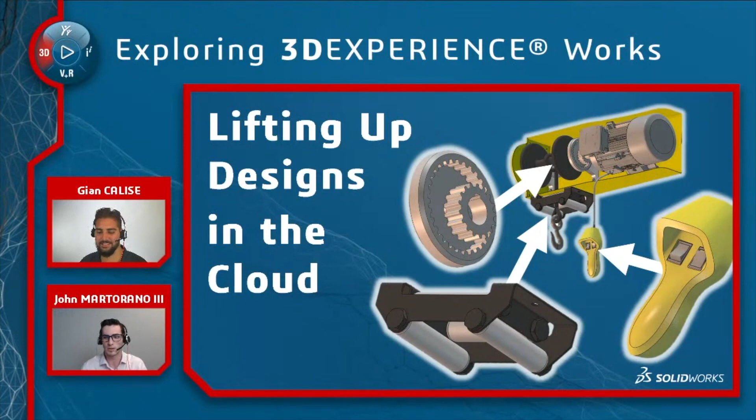In short, 3D Experience Works is a growing portfolio of hand-picked tools by SolidWorks to solve just about any product development challenge. This together you see on screen is 3D Experience Works. We have different brands that cover the different domains of the design process, from design and engineering all the way down to sales and marketing, everything in between, as you see on screen.

What does this design process look like? In its simplistic form, there's a plan, a develop, and a release phase. We all know SolidWorks tackles that develop challenge, but if you sprinkle in all the rest of the 3D Experience Works tools, they fit nicely on this process to provide a one-stop shop of connected solutions. If you joined us in 2020, you know we've been all over the map covering all of these, or at least as much as we possibly can. But today we'll be sticking to our roots and tackling some of the browser-based CAD functionality from SolidWorks, focusing on that develop phase.

So Gian, to go into a little more detail, what exactly are we going to be covering? Yeah, I can cover that.

But before I do, I just saw a comment in the chat that made me laugh. Jordan says, 'Hey John, you look extra smart today.' Yeah, a little bit smarter than usual. If you haven't been with us before, John didn't always have glasses, but we're trying to look smarter every day, you know? A couple years in this job and I'm already going blind.

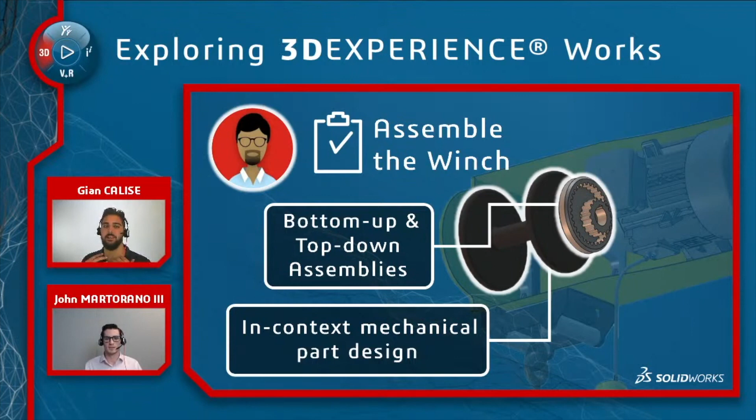From there, we're going to jump over to Debbie. I'm going to be Debbie, like I said. I'm going to show how Debbie Designer designs this controller using our subdivision modeling tool, 3D Sculptor.

3D Sculptor might not be new to you. Last session we had Jordan Tadic come on and show us all about 3D Sculptor, borderline training. So if you ever wanted to get your hands on 3D Sculptor, go reference that video, because Jordan goes from the absolute basics all the way up to advanced features. It was a great session to be a part of.

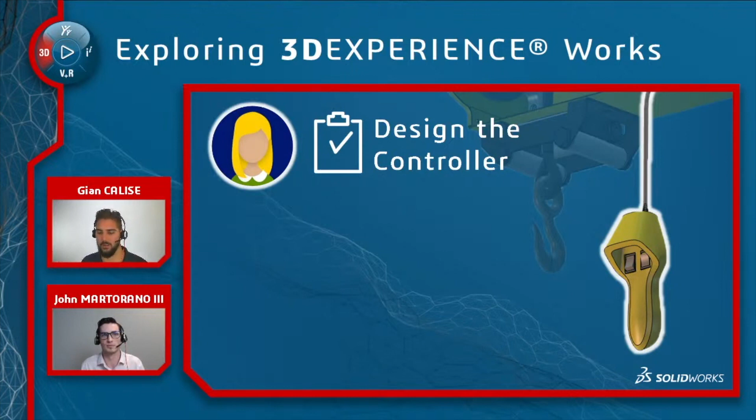In this one, Debbie's going to be focusing on the industrial design side using subdivision modeling, and she's actually going to do this at the same time Eric is working on the assembly. So a little bit of concurrent design, you'll see what it's like to work on the same model at the same time.

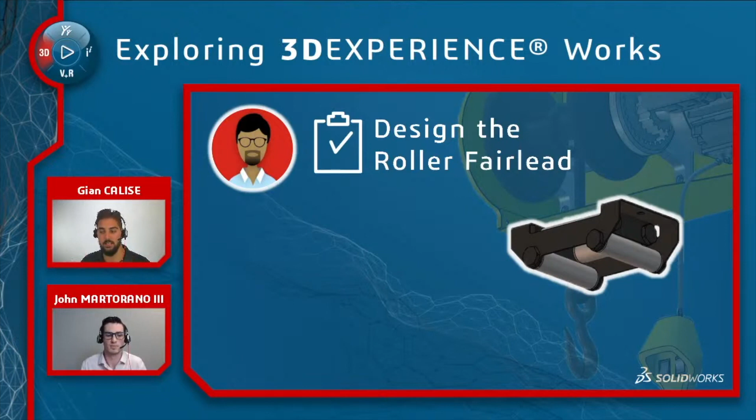Then I think finally we'll have Eric close us out by showing some of that sheet metal capability we were talking about. Taking this roller fairlead, he's going to design that sheet metal frame that is the roller fairlead there. You'll get to see some of that sheet metal part design.

So we have our characters. We've got Debbie, that's me, and we've got John as Eric. So what's Eric up to, John? How's he starting his day here?

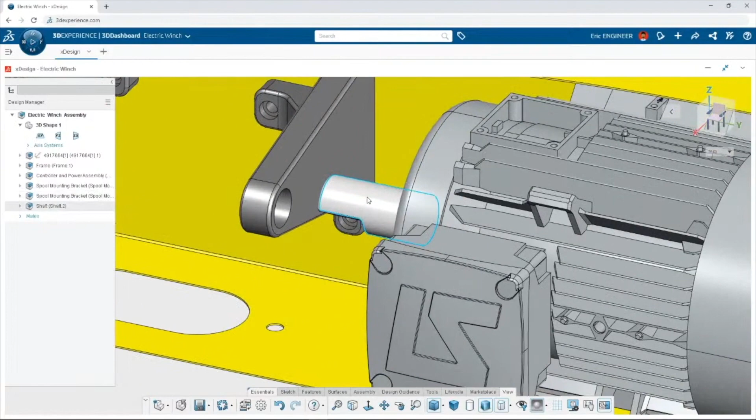Eric is actually going to be starting his day in the browser. This is a fully browser-based xDesign, or 3D Creator. He's starting the day and he sees right away in this assembly that we need some components. Does it look like there's some components missing? I think there's something missing there. Yeah, maybe a couple gears that might help.

Couple gears, right. So there are a couple different ways Eric can go ahead and add these. One, he has a separate widget of 3D space, which is where he keeps all of his data. Down below, he can insert one of the gears that way. If he wants to, he can also access that same 3D space just by searching exactly what he's looking for. You can type in as little or as much as you want, but the more you type in, the more specific those search results get. And because he typed it exactly right, he only got one or two search results.

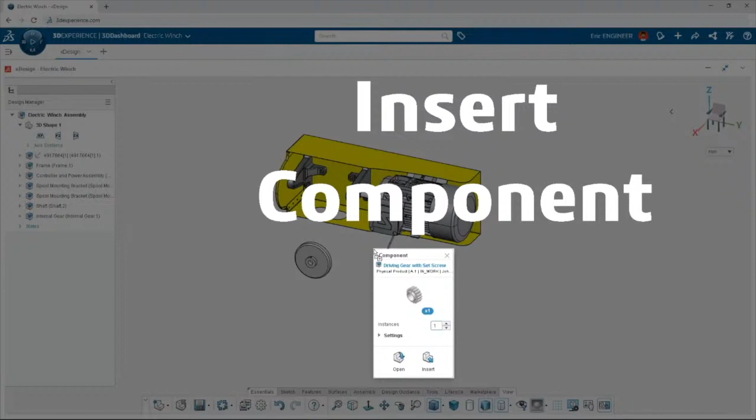So that's good. Now Eric has the option here: he can either open it up separately, or he can insert the component into the assembly, which is what he wants to do. It's also important to note he has the option to add a couple instances if he wanted to as well. But in this case, he only needs one gear, so that's what he'll do.

Cool, so you're just throwing them out into space. Yeah, pretty much, throwing them out into space, which is pretty cool. He could toggle a view if he likes; there's a view cube for all sorts of different views.

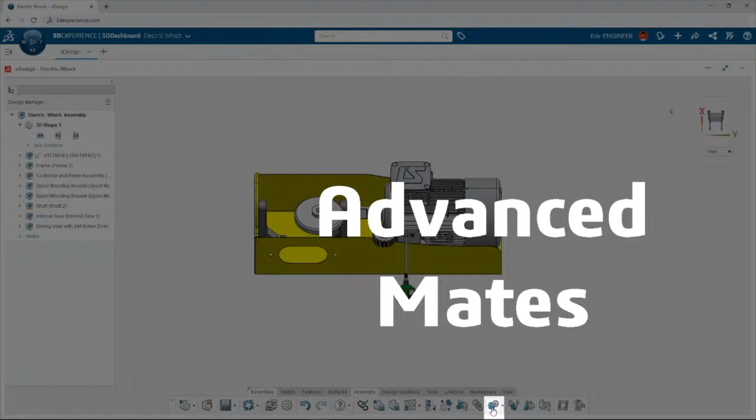But up next, what he needs to do - well, new to the latest release of xDesign are the advanced mates. So today we're going to be taking a look at the gear mate, or it's called the gear joint in xDesign. But there's also a rack and pinion joint, as well as a pulley joint. So there's a couple different options, but today we'll just be covering the gear joint.

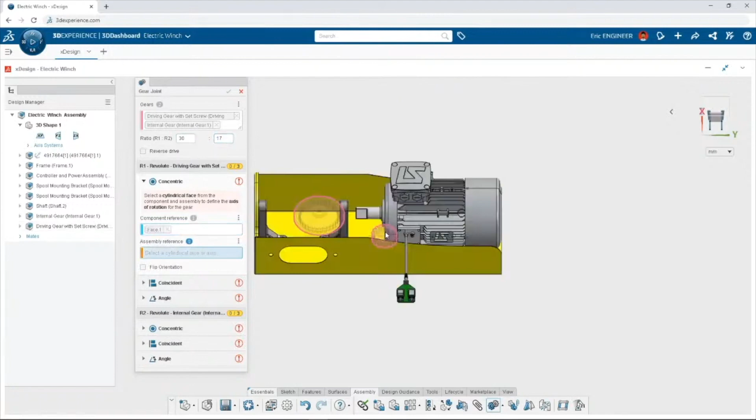All you need to do is really just select those two gears. Now he has these completely out in the middle of nowhere. He could have defined them, and xDesign would have been smart enough to recognize the mates he has to add now. But it's also pretty cool to just be able to start from scratch, right - into the middle, or have your models just floating, and then define where you want to place them. So it makes sense, right?

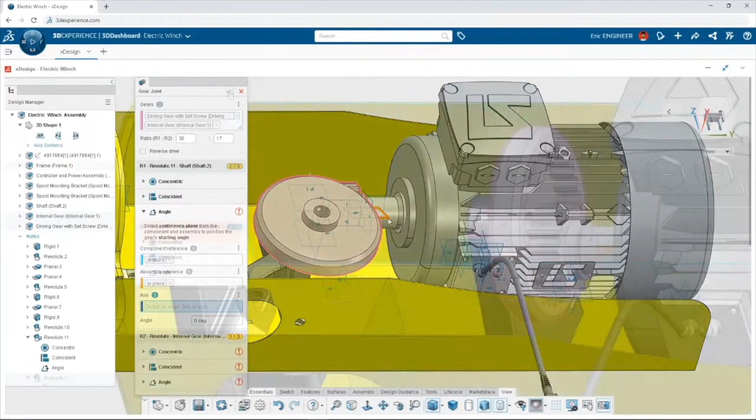He can also toggle some views if he wants to help add some mates. In this case, he's going to define an angle mate to actuate this gear as well. So he's going to choose two planes for that. And because we already did that for the first one, we'll just kind of fade through for the second one, and now they're all in position.

Let's see the moment of truth. Eric sees all three of the different mates that he needs to put in are all in there, and he clicks the green check, then gives it a move, cleaning up the tree a little bit. He can clean up shop by pressing the V key, same as going to the toolbar, to hide those planes once again.

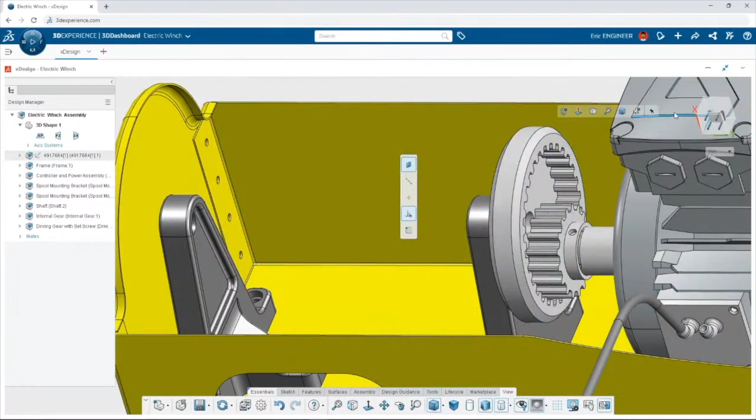He also has a trimetric view, which is pretty cool. If you hit the F key, that'll focus the model into the center of the screen. Then he can begin designing the spool that he needs to design.

We're going to do some design right in context of the assembly by creating a brand new component right inside of the assembly. Eric's going to select insert new component, and he can go ahead and name this new component.

Obviously, it's going to be called the spool. He can decide where he wants to place this component. In this case, he's just going to add a couple mates to get the origin where he wants it to be essentially. Since we already know how to do that, we'll fast forward a little bit. We wanted them right in between those two brackets, it looks like.

Now pay attention here, because now we're selecting external references. This is where design intent really comes into play, because if Eric selects the external references here, we'll be able to keep our spool within the confines of these two mounting brackets forever.

So if we ever make any changes downstream, we can kind of retain that. It basically makes those references sticky, like it makes the references stick. That's a great way to put it.

So now when Eric selects this, he uses one of the edges for the mounting bracket to define one of his sketch parameters, it's now going to be using that as an external reference, and it's going to basically stick to that face forever.

We have the S key as an option. In this case, Eric's going to use this S key, our shortcut tool, to kind of trim away some of the excess material he wants. He can pull it up again if he wants, and this time we'll add dimensions.

So John, is that S key brand new, or is that something we've seen before? It might be familiar to most SolidWorks users, and a favorite, if anything. Yeah, that's definitely my favorite feature.

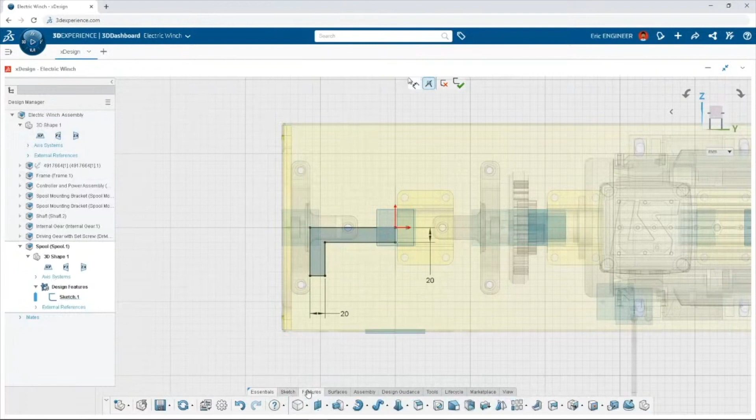Eric can come down to his features tab now and notice he's just going to hit extrude. You're like, well, why would he do that? It just looks like a block shaped L. Well, this is our super feature.

He can select extrude and just change it to a revolve later on. When he does that, all he has to do is really just click one axis, and boom, he's revolved the first half of the spool. Simple, just pick an edge.

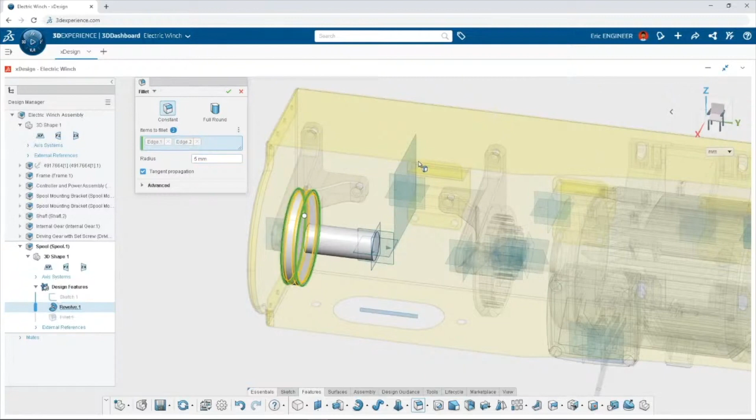Eric's going to add a couple fillets. Then he can use his buddy, the selection helper, to help him make some informed decisions about maybe what other edges he might want to select. The best part is, if selection helper doesn't select the edge he wants, or maybe there's one that's left out, no big deal. Eric can just add it right in there.

So John, you only made half of this though. What's going on here? Yeah, what we're going to do now is use the mirror plane, and we're going to mirror the other half of this component.

This all comes down to design intent again. This is to make sure that if we ever make any changes, the spool will stay right in between those two brackets. So Eric can now start a sketch. Important to note, you can also start it from the toolbar or the S key, doesn't really matter.

We do have this new feature, new to the latest release, the insert sketch feature. So if you have a pre-existing sketch that you want to use, we're just going to choose and search for a previous model we've already used. In this case it's called skeleton, the skeleton key lock we created. And it's going to identify these sketches, and Eric can choose from the list of sketches and insert it exactly where he wants it to be.

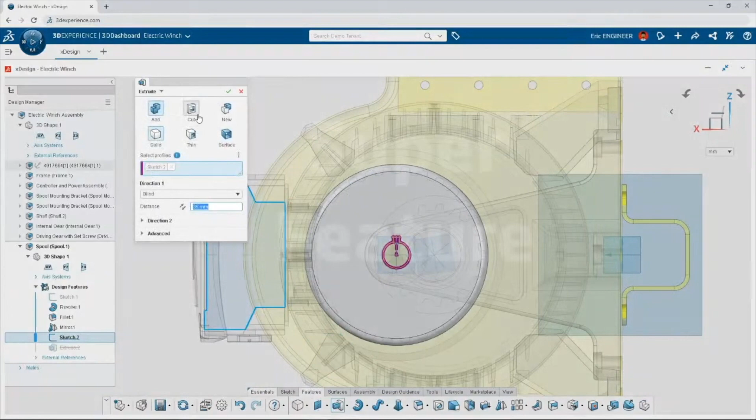So again, Eric's going to click this extrude button, but this time he has the option to not only add material but cut away material. He can make it a surface if he wanted that. It's cutting through all of the geometry. Let's just take a look at what that looks like. Yeah, I'd say that pretty much satisfies it.

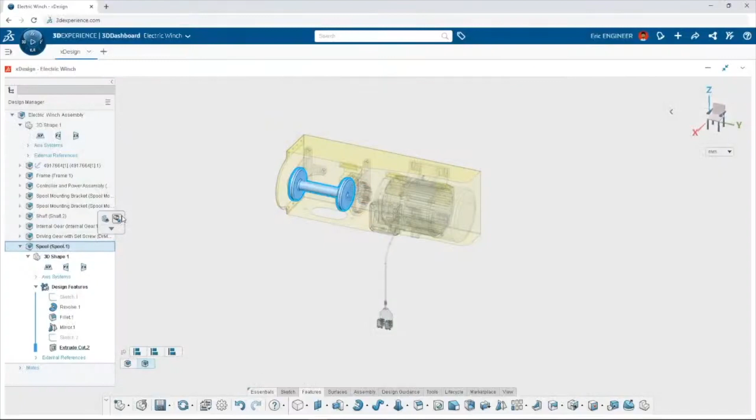I guess the last thing Eric needs to do here is just apply some material. And again, we want this really strong, so we'll just choose 1023 carbon steel there.

And wouldn't you know, we've pretty much done everything we needed to do. But how about we test out what it looks like? Like what happens if you need to make a change? Let's go ahead and do that.

So what Eric's going to do is basically edit the sketch, and this is the base layout for the actual sheet metal component. When he does this, he can just change one dimension, changing it from 250 to, let's say, 270.

And then watch what happens. So it should make the spool a little bigger then, right? Boom, you see that? It updates in real time. That was quick, but I did see it.

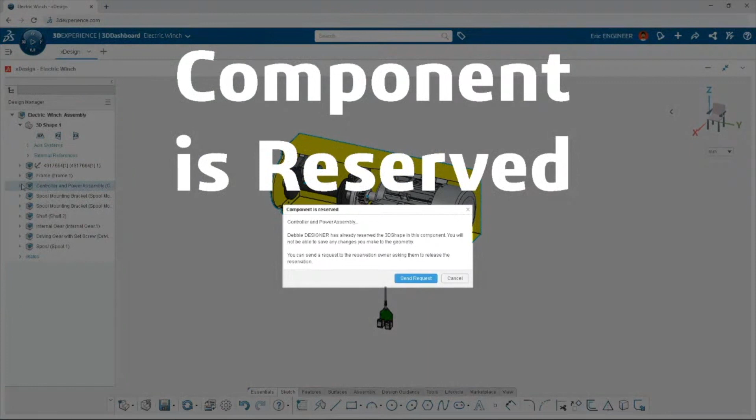And I guess the last thing Eric wants to do is check in on Debbie's project, to see how she's doing with the actual controller unit itself, where the green PCB board is off the end. So he can just double click on the Controller and Power Assembly, and he gets this message that pops up saying the component's reserved, and he knows who it's reserved by.

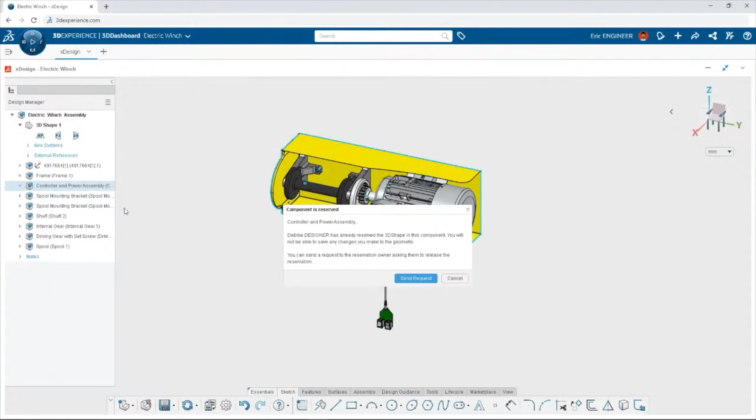Basically this just means he won't be able to make or save any changes to the geometry. But there is good news because he can send a request that she actually frees up the geometry and unreserves it. So that's exactly what he's going to do, and that'll give Debbie Designer a notification instantaneously that Eric's looking to work on that model.

So I think pretty much for now, Eric's work is pretty much done. Do we have time for any questions? Let's see what Debbie's up to. But yeah, we do, I did see a couple questions.

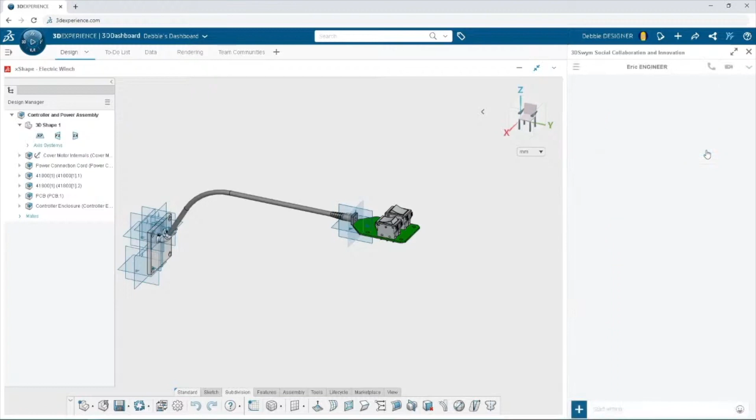She's not ready to give it up yet. So she's starting a side conversation with Eric right in the side panel to say, 'Hey Eric, I saw your request, still working on it, and I'll message you when I'm done.' Just a great way for them to keep in touch with each other.

Throughout this design process, looks like Eric said that sounds good. He'll move on to something else, that fair lead. Sounds good to me. You can also like messages or reply right to them. I really like that. But I think we're on the same page, Debbie and Eric.

So let's get to work now. We're in 3D Sculptor.

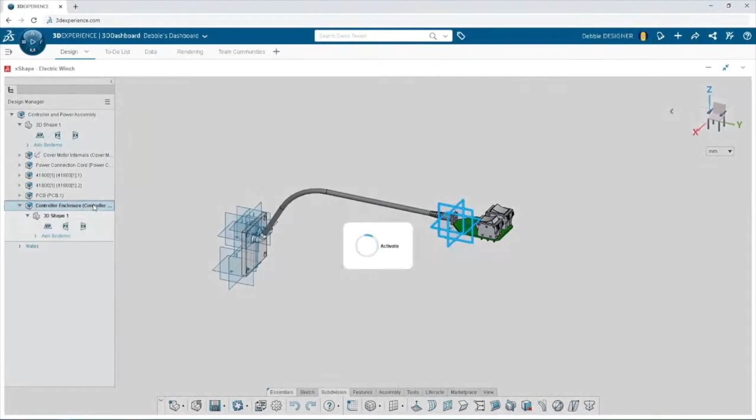Like I said, if you joined us last session, you saw it. Jordan was all over the map with 3D Sculptor showing us how to get things started and how to use some more advanced features. But just like he showed, I'm going to start with the basics and how you can start a shape with these primitive shapes here that are almost like a digital hunk of clay.

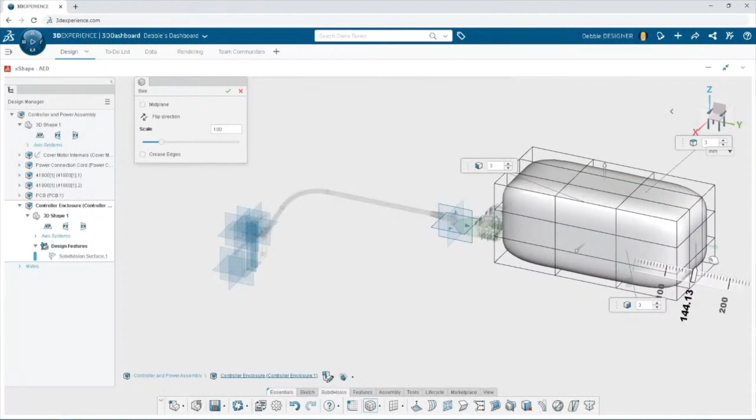I'm going to start with the box shape, and I can resize it in any of those three principal directions. I can also control the number of control loops that go around this model. And I like to start with less, if you can. I always say less is more with this because you can easily add more detail and control as you need to.

So here's the robot, and this is the main tool that we're going to use. I call it manipulator because it's basically the main way to manipulate the model. You'll see it's this little triad tool, and I just highlighted the arrows there in red. Now those arrows are for you to translate either the whole body or just the selected area of the model.

Then you can also use the arcs there that I just highlighted in red — that's for rotating your selection. And then of course the points at the end of those arrows, those are for scaling. So you can translate, rotate, and scale all in one tool.

So that covers a big percentage of what you would actually want to do with subdivision modeling. I'm going to get this thing lined up, but I need it to be right on that center plane. So if I select that plane, our in-context toolbar shows us that we can center it on plane right here.

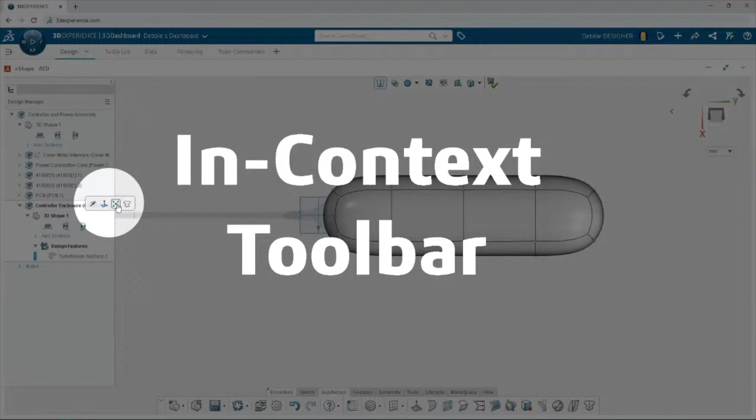And that in-context toolbar will show up with different commands based on my selection, because that's exactly what it is — it's just in the context of whatever I'm doing. So xDesign or xShape are just trying to predict what my next move is going to be based on my selection.

So that's all centered. I can do the same thing to turn on symmetry, and now whenever I make a change to one side of the model, that'll also happen on the other.

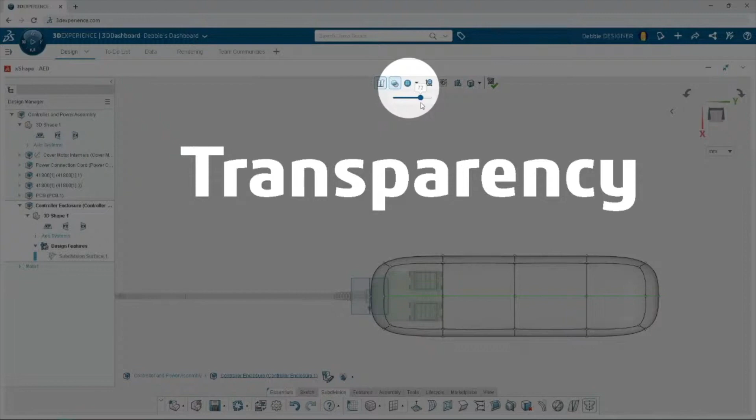Another thing that I really like about this is transparency. So designing these kind of enclosures or things that go around a lot of internal components, it's nice to get a reference for size and shape by turning down that transparency, or turning up that transparency, I should say. So there's how we scale — by clicking and dragging points.

And there's some translation. We can move the whole body once again, and maybe I'll just select these bottom edges. This is how we can rotate, using those little arcs in between the arrows. And that's how we can rotate certain areas of the model.

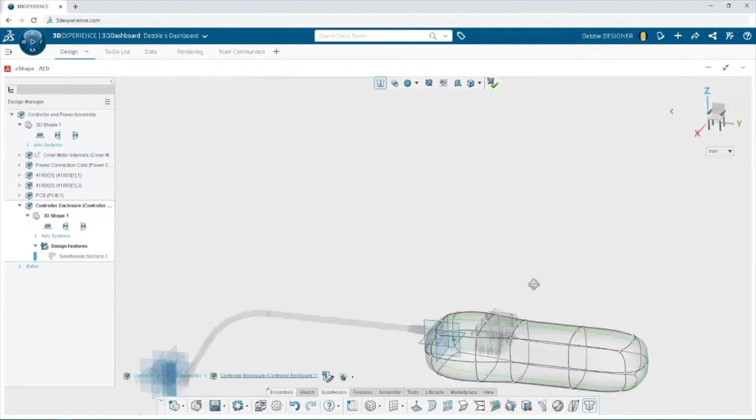But let's move on, because I have some things I need to do to this model. After I get the general size and shape, I want some type of protrusion on the top so that if somebody walks by this controller, I don't want them to hit it and accidentally drop a thousand-pound piece of equipment. Yeah, it probably wouldn't be too great if that happened.

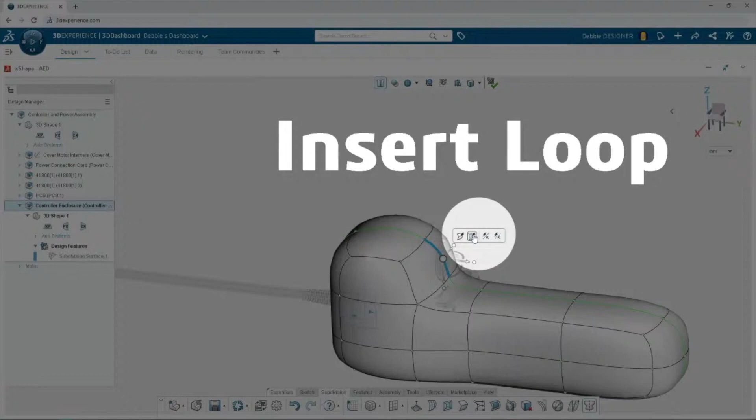So I'm going to use the extrude tool to add some protruding material out of this face. Now here comes a couple other ways that you can quickly change the geometry in here, and that's inserting loops. By clicking this after selecting that edge, it's going to put a new loop perpendicular to the edge I selected.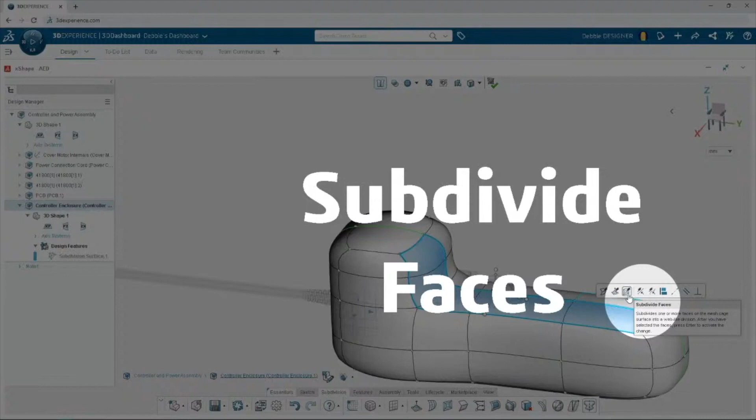And here's another way we can add more control: the subdivide faces tool. Subdividing these faces is just going to, quite literally what it sounds like, take these 5 or 6 faces I have and turn it into 12 or however many, almost like an offset of the shape I already have.

So that's how we just added some more loops here, and that's looking pretty good. But maybe I don't want everything to be so soft, like I want some sharp corners, the crease edges. That's perfect, that's just what I need it for. So I'll add a couple creased edges.

We're already getting well on the way to the final product. But I want to actually subdivide those faces again, and I'm going to add a crease too, because I need that to be hollow in there. I need some area for my buttons, and you'll see what I mean as I push this face back. That's how I'm opening up that area so we have space where our buttons will be. I think a nice creased edge here will look nice as well.

So, one of the things I've noticed is your mouse has not left the graphics area once. I mean, that's the beauty of these cloud apps, or really SolidWorks. I want to say the cloud apps, but that's just SolidWorks.

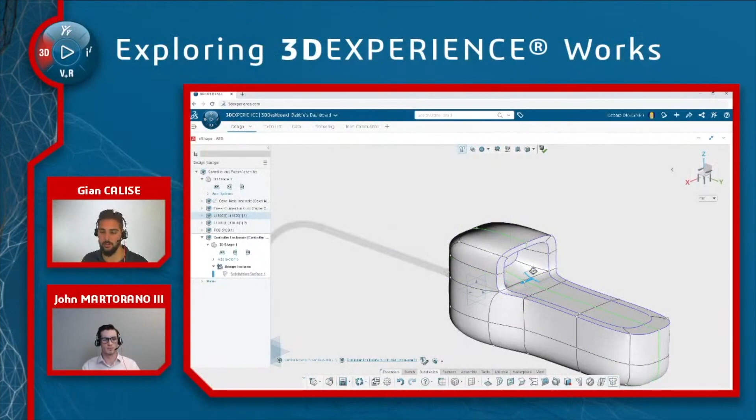If you use SolidWorks desktop and you've learned a lot of these tips and tricks along the way, you probably know there's not much reason to use toolbars or go out of the graphics area. We're trying to replicate that with these new cloud products as well, so I'm always excited about that. If I never have to touch a toolbar again, I'll be happy. But I think I'm going to keep moving on this one. I got a couple other things to do to this model to get it ready.

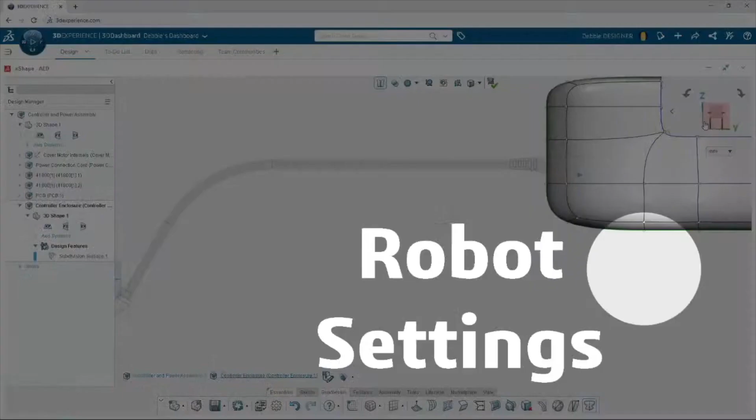So I want to fast forward just a little bit to these robot settings. So the robot settings there, oh, whoops. We'll just take it back from here. No problem, a little bit of technical difficulties, folks, but hey, that stuff happens.

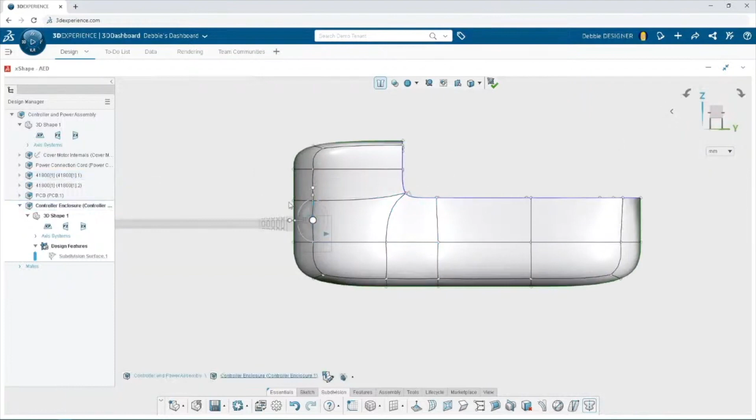So one of them, I'm just going to fast forward through some of the other areas of this, go a little fast paced, and get to these robot settings. This is what I was trying to get to. Okay, so the robot settings are actually something that you can adjust.

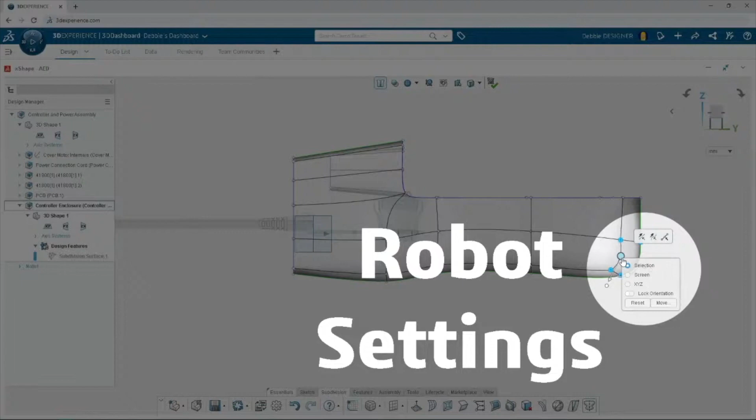Right now it automatically orients those arrows and arcs based on what I select. But if I only ever want to move things in the XYZ direction, I can adjust that right here just by right clicking on it. So now, as I continue here and make just a quick adjustment to those settings, now I can just make it XYZ and only move things in and out of those planes.

But there's other things we can do too. This is one of my favorites - we get the question a lot, like how precise really are these surfaces? Well, they're as precise as you want them to be. So I like to use the numeric inputs as much as I can.

This is something Jordan showed last week too, but it was so cool so I had to show it again. Basically I select everything I want, and then instead of just pushing and pulling on an arrow, I click on the arrow. Then I can type in a numeric input for how much I want to move that - maybe 5 millimeters will work, or we'll type in -5. So we can go in either direction.

And that's one way we can have a very precise dimension right there. Now, this is another thing I really like that Jordan showed me - I got to give credit to Jordan here. He showed me that you can actually move the robot. So when you manipulate things, it's based on where the robot is. But if you move the robot, that changes how things work.

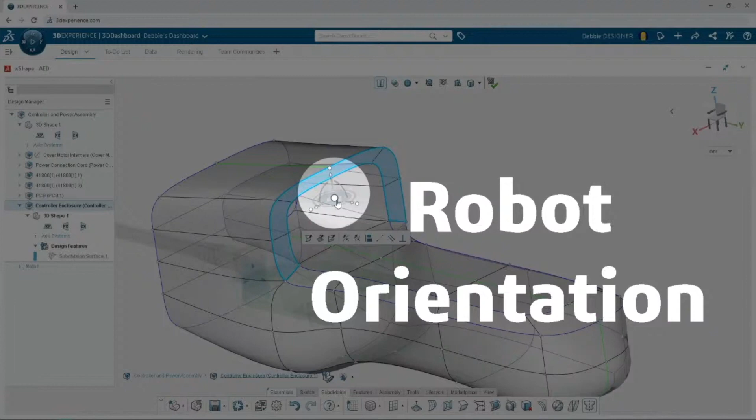So if I wanted to rotate this face about the bottom edge of it, I can put the robot right there and then rotate it and have that be my hinge point for where I'm rotating. That's pretty cool - it's just easy, you know? It's very easy to do.

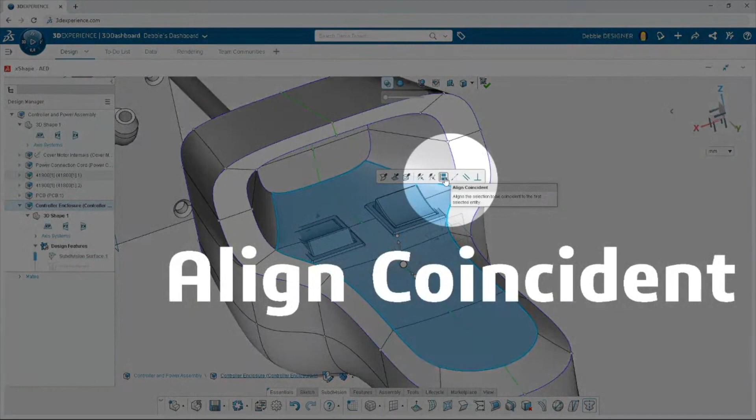So another thing - I want to make sure all of these surfaces are coincident. So those ones I just selected, I want basically all to be flat. I'm going to use the align coincident command, and you might see a little bit of a change, but it's still not completely flat. You can see because some of it still overlaps with my buttons there, with my switches.

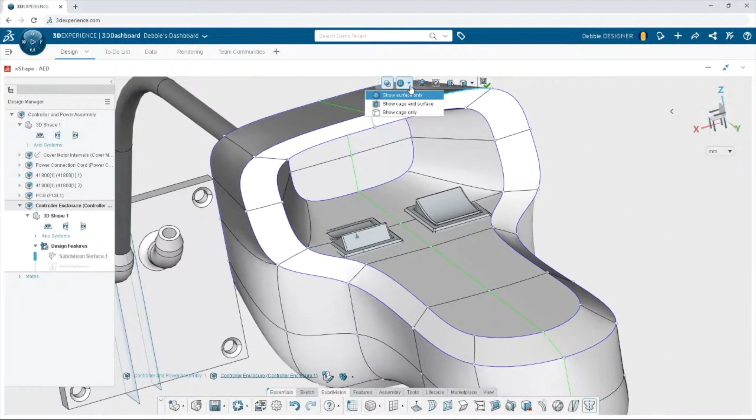So I can turn on the cage view right here to see what the surfaces actually look like, these driving surfaces. If this is confusing to you, it's really just the points that drive what your surface ends up looking like at the end.

Jordan went into this a lot in our last session, so I highly recommend going and watching that session again if you haven't gotten a chance to.

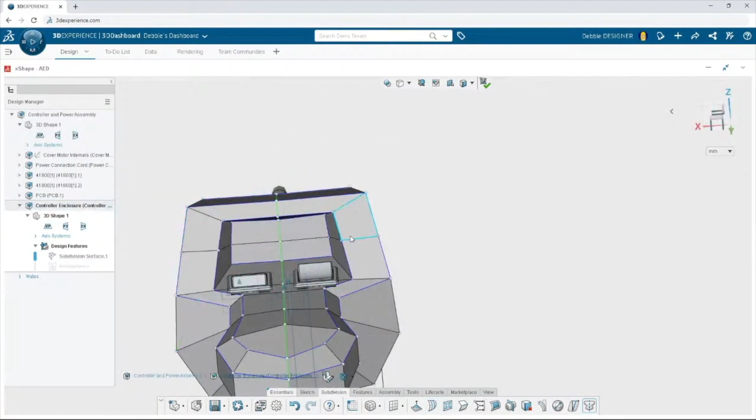But just making a few cage cleanups - this is a very important step in the model, because if the cage doesn't look right, doesn't look quite like what I want it to look like, then the surface certainly isn't going to. But if I adjust everything and get it to where I'm comfortable with it in the cage, chances are it's going to look a lot better once I'm ready to actually show the surface again.

So let's see what that looks like now. And boom, yeah, that looks - I should have done a before and after shot because this is just so much smoother than it was before. And I like that it's got style, but it's also pretty industrial.

Draft analysis is always one of my favorite tools to show with 3D Sculptor, because it's dynamic. So I can set a draft plane and it will colorize my model with the green, yellow, red that you're familiar with from draft analysis in SolidWorks. But with the subdivision environment, now I can change this dynamically and watch the colors actually change as well.

So see how that yellow just kind of disappeared. This is great for when you're trying to define your parting line, or really just prep this for injection molding. We're not going to do too much prepping for injection molding.

We'll show a couple more features just to show you what else we can do by combining 3D Sculptor and 3D Creator. So I'm going to switch to xDesign.

Yeah, John, I'm taking a page out of Eric's book right now - or I should say Debbie's taking a page out of Eric's book.

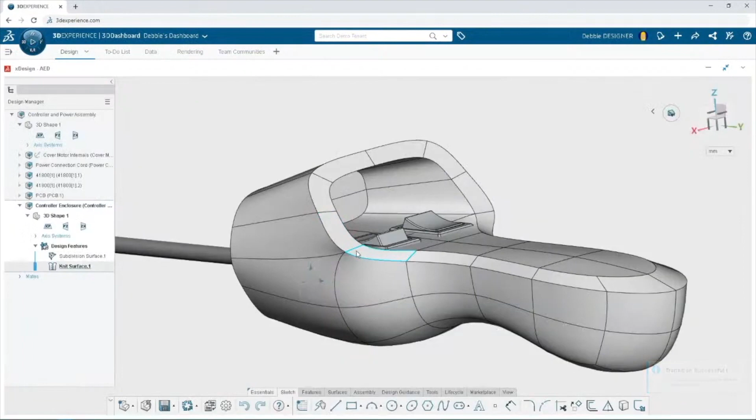So Debbie's just going to add a couple parametric features. Again, I'm fast forwarding through some of the setup just to show you how we have this sub D surface, but now I'm going to take sketches. I'm going to use geometry that's already in here to just punch a hole through part of my sub D body.

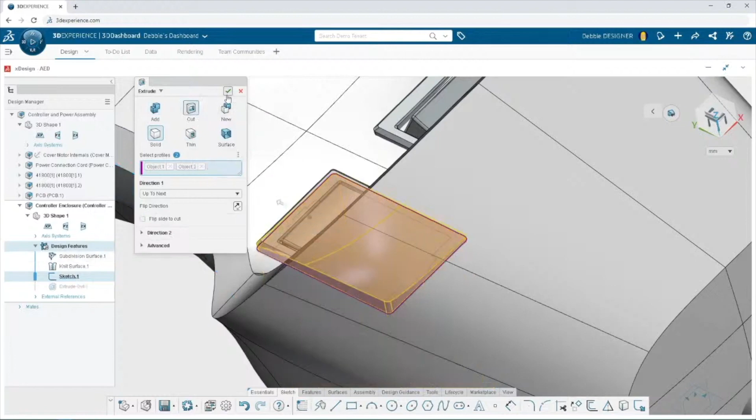And we can actually go hide that - let's hide that switch so we can see what the hole actually looks like. And that's perfect, because these kind of switches just kind of press fit right in there, but then they still need to be soldered onto the PCB board. But we're not going to touch too much on that.

I do want to do a quick mirror to get this cut to be on the other side. So the S key shortcut is always there for you, and since I'm in the part modeling environment right now, it just gives me my most common features.

So just like that, I mirrored that from one side to the other, and that's looking good. I still want to show you a very important part of this type of industrial design approach.

I'm sure a lot of you are wondering, is this shellable? Can I add a thickness to this design? A lot of times with other sub-D products, you can make a beautiful surface, but it's not easy to shell it out or apply uniform thickness. Lucky for us, these parametric features are designed to work in tandem with subdivision, so we'll be able to shell this out no problem and get it ready for injection molding.

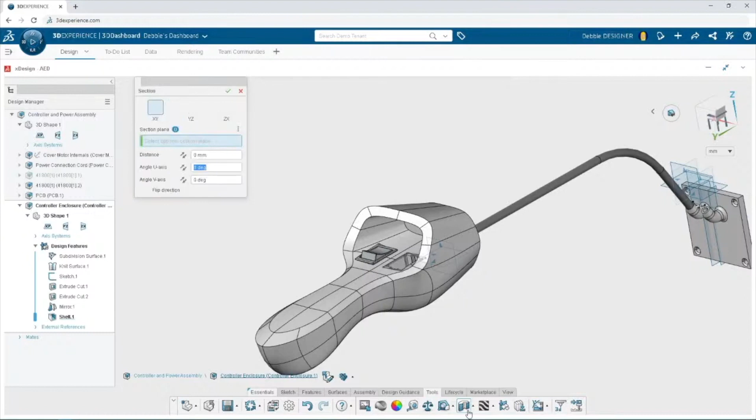There's still plenty more steps, but just to show you what it looks like with a quick section view. Maybe I should use the ZX or YZ plane, and I'll drag this plane over so we can see the inside. We can just switch that direction, and now we can see our nice uniform wall thickness.

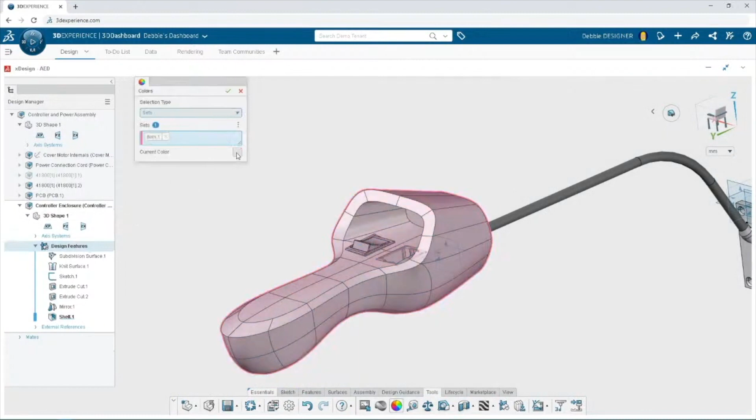I'm sure a lot of you engineers who make injection molded products know this isn't ready to be injection molded, but it's the start of a nice concept for our design. I'm pretty happy with this, and I think Debbie's pretty happy with it too—so happy that she might be ready to call it a day and finish her task.

So we're going to save this component and let's go over to our to-do list.

Little bit of a hiccup there, folks. Sorry about that, but we were able to drag and drop our design right from the design tree into our tasks list. That was our one task we had to do, so we're done for the day. But one thing we do want to make sure is that we close the loop with Eric.

Eric is still working on the assembly, so let's jump back into our conversation there and let him know that we're all done with that power subassembly that she was working on. So hey Eric, all done on my end—do a quick refresh and you'll be able to see all my changes.

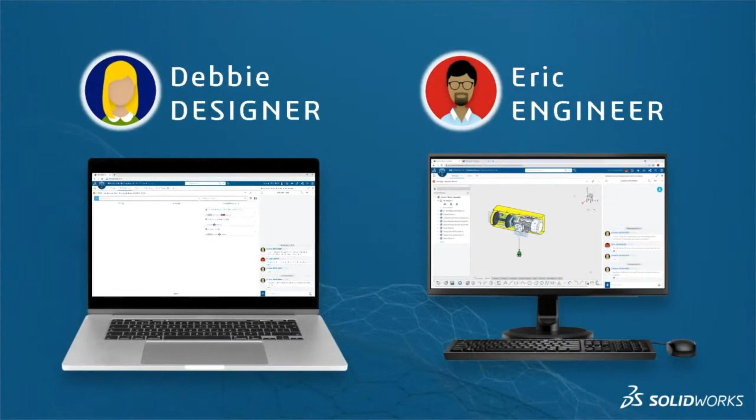I'm just about done now—or I should say Debbie is just about done now. So I think that we're at a good point to just stop and check to see if there's any questions right now. Yeah, what do we got for questions?

Richie Moore asked if creating this same geometry would take a lot of time with 3D sketches. I can tell you from firsthand experience, it most definitely would. I've used SolidWorks a few times trying to use 3D sketches with a bunch of splines to basically create the outline of my part—like the control loops you see around this sub-D body, I tried to create those with splines and 3D sketches, and that gets time consuming and difficult. It's hard to keep track of things. This workflow is such an improvement over doing stuff like that.

Don't get me wrong, there's totally a big place for traditional surfacing tools, but especially when you're in conceptual design and you want to see how this is going to work and really find the form, I would definitely recommend using 3D Sculptor. You can't beat Sub-D, I mean, with real-time draft analysis—how can you beat that?

Eric said being able to control the robot orientations is fantastic—completely agree, and you can thank Jordan for showing that to me and to you. He also said, not bragging too much, but the cage with surface view was something he heavily lobbied for with Rob Jost, our R&D owner of the 3D Sculptor product. I'm glad, Eric, you pushed for that because it has a lot of awesome uses too. I personally like to stick with either cage or surface, but I definitely find myself in that cage with surface view many times throughout design.

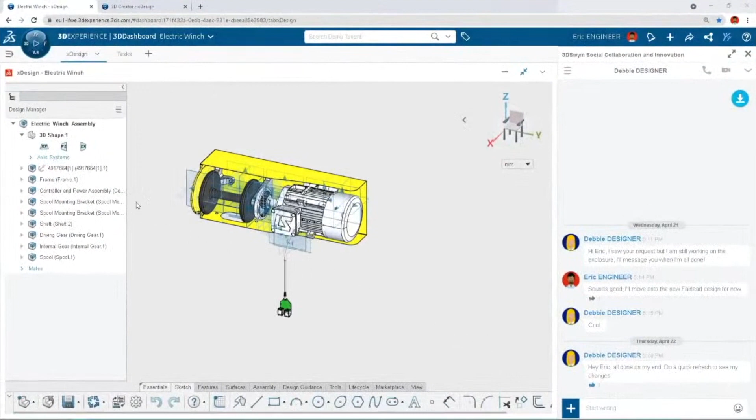Let's see. Debbie did her job, now Eric's gotta finish what he started. Let's take a look. Eric sees the message and does a quick refresh as she instructs. Beautiful. We're just kind of wondering here, what's this model going to look like?

Wow, it does look very nice. Pretty cool, I think it looks even better. She matched the color with the frame. Matching color with the frame, got the swatch down, nailed it. Perfect, looks great. Eric's so excited, it looks like he's about to add a smiley face emoji - you could totally do that - but I guess he's not that happy, he's a professional guy, boring.

Eric's got a lot of work to do, and it primarily revolves around designing this Fairlead frame. So we set up a surface that you see in the middle, and this drives the position of our roller. Changing the dimensions from that sketch of the surface will actually drive the dimensions.

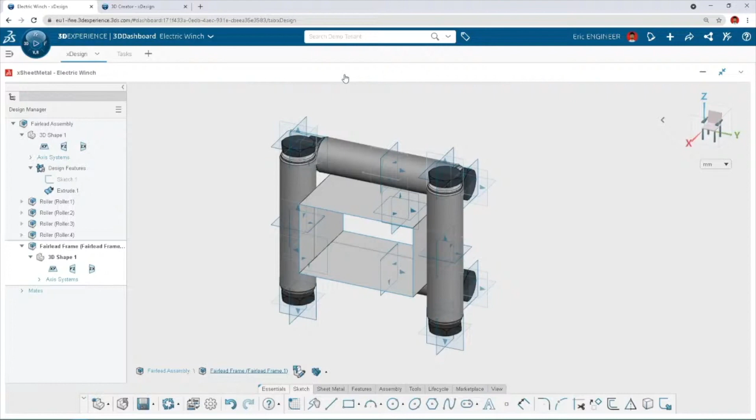So which dimensions are you talking about, John? These ones you see on screen here. I see, yep. So it's pretty simple. Again, this kind of goes back to that design intent that we talked about, right? So it seems like this is probably a pretty crucial area - you definitely want to have something so you can update changes later on.

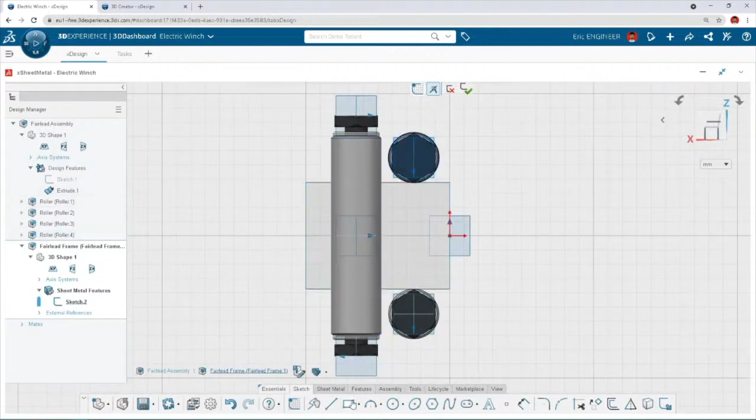In the meantime, Eric's got some work to do. He's right now started a sketch. You can click on any planar face, and he's using as much of the existing geometry as possible, like convert entities, snapping to other entities that already exist - those one-click dimensions are some of my favorites.

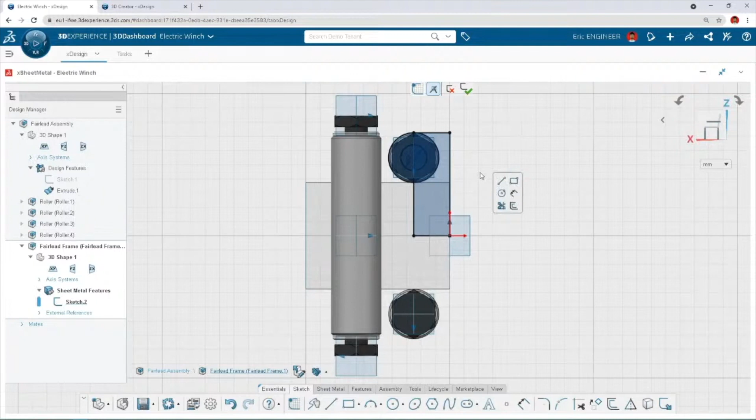One-click dimensions are dreamy, but what else is dreamy is that S key toolbar right here. So we're in the sketch environment, so we get sketch options. In this case, Eric's just going to trim away, just like he did before with some of the other stuff, just to go ahead and complete that contour.

What he's going to do is actually start by making a wall from this sketch, but first he needs to define the sheet metal parameters - like how thick do we want it to be, the bend radius, K factor, things of that nature. Relief is important too, so he's going to choose the rounded relief option.

It's important to note that he could change these at any time, and he can quickly jump into a wall feature. Look at that - I think that looks pretty good.

What's also pretty cool is that he can click one edge, and the in-context toolbar we talked about comes up again, and this time we can do a bunch of different things, one of which is create that wall-on-edge feature we're looking for. So really just with one click, we can take a look at what material side, flip to the material side that we want, and we can even make it 65.

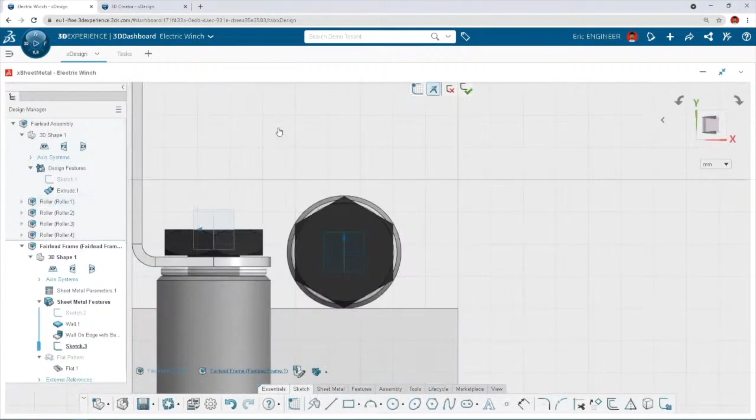Let's see - and then we're going to basically do the same exact thing again. But this time, you've kind of already seen what that looks like, so we're speeding this one up a little bit because it's pretty simple.

If you use SolidWorks, there's not too much different about the sketching, right, John? Exactly, there really isn't much different at all, which is exactly what you want. He's doing the same exact thing, really just getting his sketch from blue to black, meaning that it's fully defined. Which I like is that little angle Eric added there.

So he's actually this time going to exit out and click the green check, and then presses that S key again. Remember, because this is dynamic, it now changes - we're in the modeling environment, so we get modeling options. So we can add a sheet metal wall too - there we go, boom, done.

But it's kind of an issue, right? John, I don't know, maybe I'm missing something, but don't you want this to be one sheet metal component? We do.

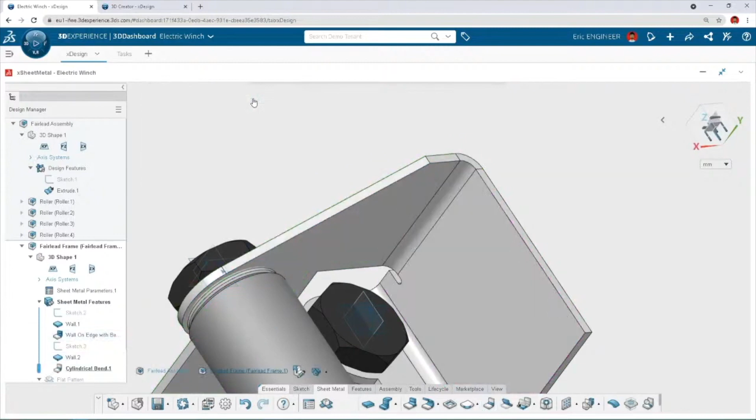Luckily, there's a feature called bend, and what we could do is just add these two walls together. It's literally as simple as it looks. You just click the two separate bodies, and now they're joined into one. And there's that relief we had in mind, it does it all for us. It's pretty amazing.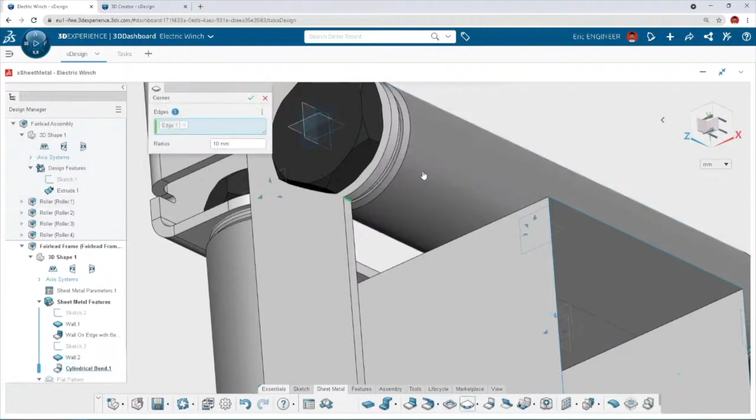But I see some sharp corners though, those got to go. What's really nice about this is, just as Eric did before, we can get that in-context menu to pop up, and then select the selection helper, and it shows us that it thinks those faces based on that one selection should also be selected. As before, if it doesn't get everything, you can select a couple more edges you want, define a radius, and you're good to go. But you might notice there's only a quarter of this, right?

So you must have some type of plan, like how are we going to turn this into an actual part now? Again, S key to keep my mouse right in the graphics area, and I'm just gonna do a sheet metal mirror. I'm just gonna mirror the entire body to one side, and that creates half of it. And then just do that again, and we got the entire assembly, or the entire component now mirrored. So that's how you go from a quarter to the entire thing.

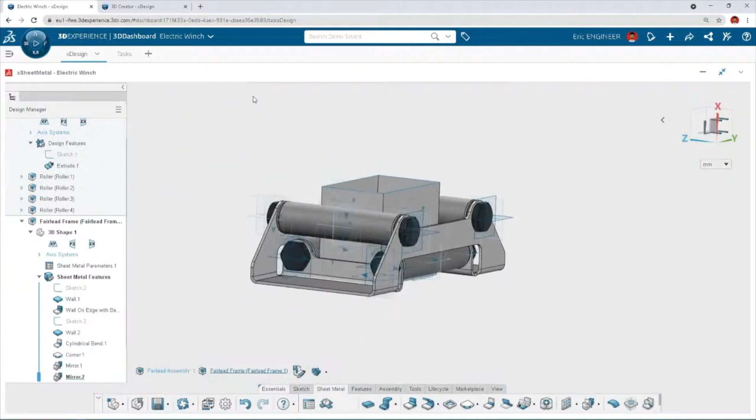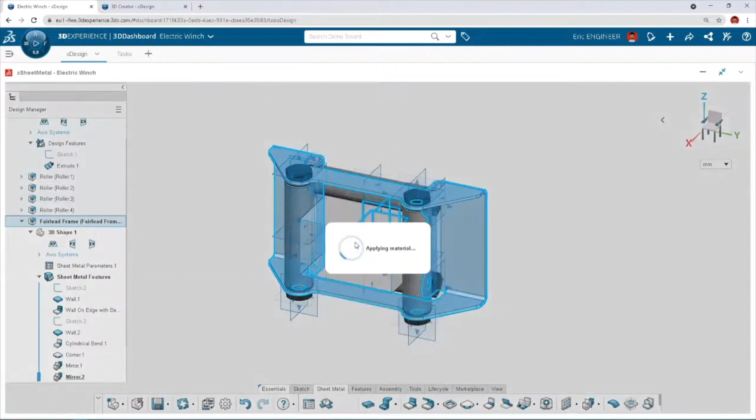Wow, I thought we had a lot more steps to do after that, but I guess not. I guess the only thing left we got to do is add that material, which again, we need something really strong. I could search it up top, but because these are in these nice folders, I'm just gonna choose my 1023 carbon steel sheet, and that'll work perfectly.

Nice, so can we see some type of flattened view or something? Absolutely, so we got the flattened view. What would a sheet metal product be without a flattened view? We could quickly toggle again in that same in-context menu, and it looks pretty good. Then we could do the same exact thing to go back, and we're back in a trimetric view, and everything's looking pretty good.

I'm curious though how this surface thing's gonna work. Well, remember we promised we were going to design this with the design intent so that everything would just update automatically, and I think we'll deliver on that promise. So all he needs to do now is edit that sketch that drives that rectangular surface and change it to 135, and then boom.

Did you see any issues with that? I think it all updated beautifully. You know what, here's the thing, if it doesn't update as you expected automatically, we have an option called global refresh, similar to something you might be familiar with as a SOLIDWORKS user, basically just the rebuild command. That's the desktop rebuild command in SolidWorks. That's right, so just a different name, but same exact thing.

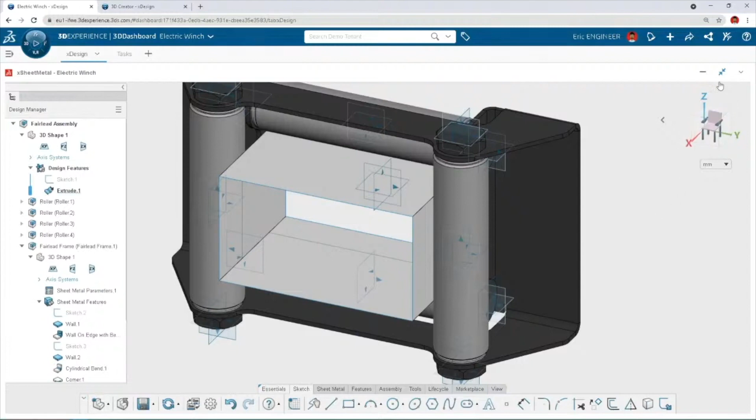So I think now it's time to add this fairlead frame to the assembly. This will be as simple as dragging and dropping from the design manager right into the other assembly and just inserting it as a component. Now we need to get this into place with some of those mates that are really easy to add, but seems as though we've already kind of seen this once or twice in this session, so we'll just go ahead and fast forward a little bit. But yeah, we're looking pretty good here.

So I think I need a hole though. Yeah, I don't see a way to attach this connect thing, it's not just gonna magically hold itself in place. And you know what, shoot, we kind of forgot that. The thing is, I've been in several situations where you're like, oh man, I should have added this a long time ago, but it doesn't matter because you have the rollback bar, right?

You could just add any feature you want right in the middle of the design, and that's exactly what we're gonna do. But we're not going to just draw a circle. We're actually just going to reuse and convert entities for an existing hole that already exists in the yellow frame and just blow a hole through the fairlead.

So it sounds like you really don't have much original geometry in this frame then, right? No, it's pretty much all driven. And that's great because that's great for updating downstream, to make sure these holes line up. I mean, imagine if I had to go and define a sketch where I'd want that circle to be, I'd have a greater chance of getting that wrong.

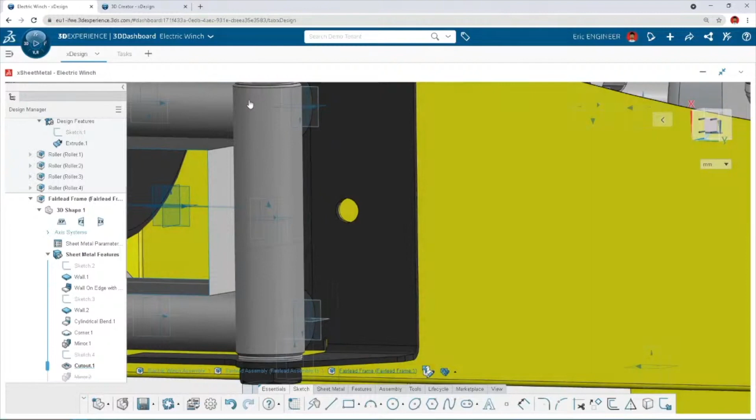But if you remember correctly, Eric does have a different task to do, right? Well, I think we want to probably get that to the other side first. Yeah, of course. We just roll forward the rollback bar, and boom, there it is, located on the other side. And again, that comes down to design intent.

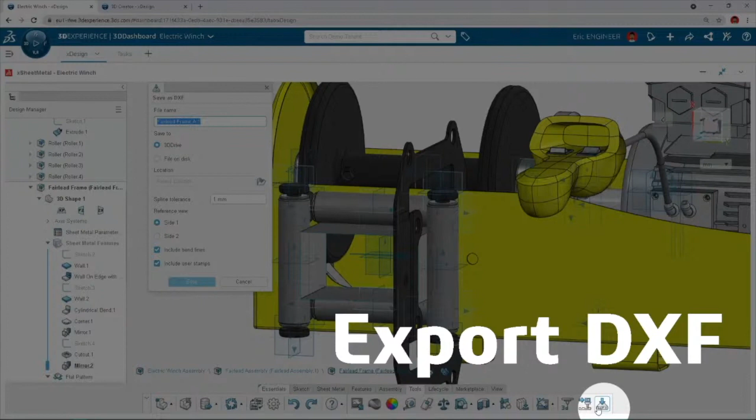But what use would it be if you couldn't export this and send it to sheet metal manufacturers to get some quotes, if you didn't want to do your sheet metal in-house? Well, luckily you can. There's the export DXF option in 3D Sheet Metal Creator.

So that's exactly what Eric's going to do. You can actually save this directly to your hard drive, or you can put it in 3D Drive, which is basically just a generic storage app on the 3D Experience platform. Let's just use 3D Drive so we could just keep it all in the same place. I could pull up my side panel here, and you could see that it shows right up.

Wait, I know you might be wondering what's the benefit, why would we want to do this? Well, what I can do is actually activate an external sharing link so I can share it with manufacturers, and I could copy this link, and anyone with the link can literally view this, and they have options to do markups. It's pretty easy to get signed up to if you don't have a 3D Experience ID, because that's all you need to do to view this. It takes less than 30 seconds to make, and then they can see everything on their end.

And this is what it'll look like. Here's a nice preview window, and they can again mark it up, download it, print it, send it back. That makes sense. I was gonna ask why you didn't just download the DXF and send it in an email, but I guess this makes for less duplication of documents. Yeah, why not let the manufacturer have a little fun too, right?

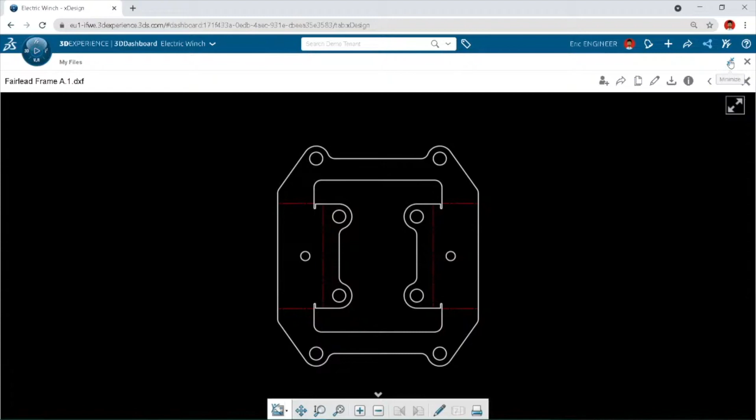So what's next for us though? Yeah, I'm getting a little sidetracked, I'll go back to Eric now. So one of the things he needs to do is actually just copy this DXF and add it right into the task as a deliverable. So that's what he's gonna do, and just like everything else, pretty much, it's just a simple drag and drop.

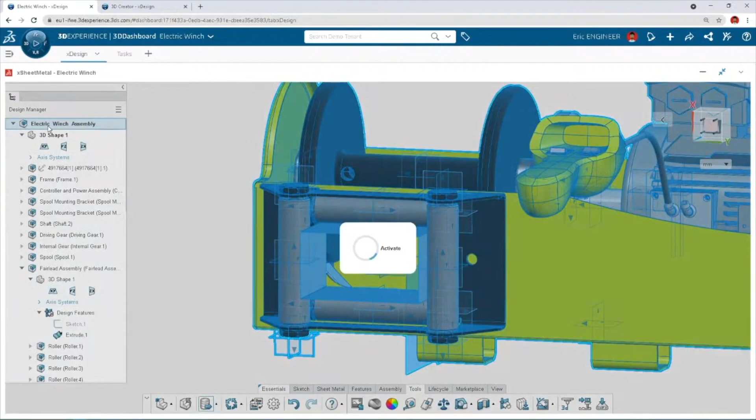And he could save it, and then what he's gonna do is just drag and drop this into completed because he's completed one of his two tasks. I think he's got one more, right? That one more assembly, he's got one more task. So the task itself is actually to complete this entire assembly and add that as a deliverable to the task.

But wait, wasn't there something cool you wanted to show first in xDesign? Oh, yeah, I forgot. But first, let me hide some planes, sketches, hidden lines. We clean up the model a little bit, do shading with smooth edges here. And here's some new realistic environments. Again, this is new to the latest release of xDesign.

So dark mirror sounds like your Netflix show that you've been watching. Maybe a little less grim than that, but yeah, I would say usually this one looks actually pretty cool.

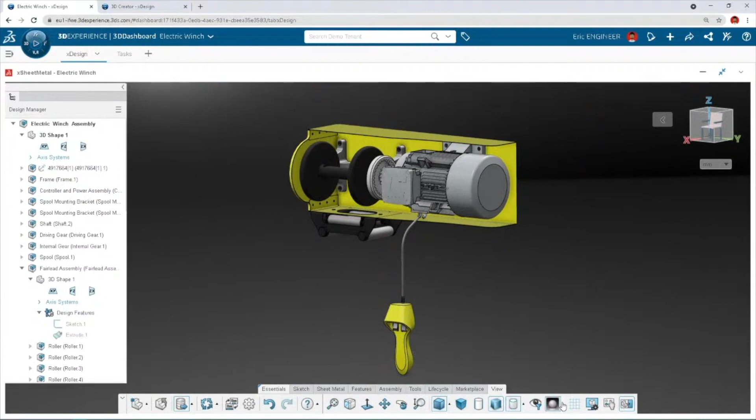I like the shading on this one, this was actually my favorite. And if you don't want to hurt your eyes, this one's the good one to use, but there's several others. I could keep going here. Here's the studio view, it's white mirror. Here is an outdoor view, road, city.

Do I need to go on indoor? Yeah, that's pretty cool. But all right, let's get this thing done, man. Yeah, you're right, you're right.

So once again, we could just drag and drop from the design manager into the new tab onto our task and add this as a deliverable. And just like that, the most satisfying part of the demonstration is when you can drag something from in work to completed. With that, I think that's it for Eric Engineer.

I got to do it once, and then I think we saw Michael Steves was the host, and now he's the presenter, now Andrew gets the host. It's just cool, we get a lot of new faces up here all the time. But I digress. Thank you again for joining today, and we can't wait to see you next time.